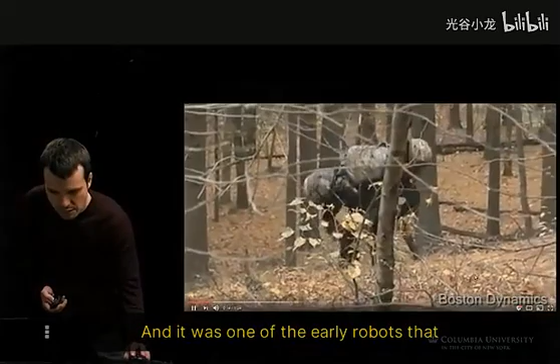Here's an example from a company called Boston Dynamics, which is now part of Google. And this is one of the first legged robots that they successfully demonstrated. This is Big Dog. It's a quadruped. And it was one of the early robots that was shown able to robustly navigate difficult, unknown terrains.

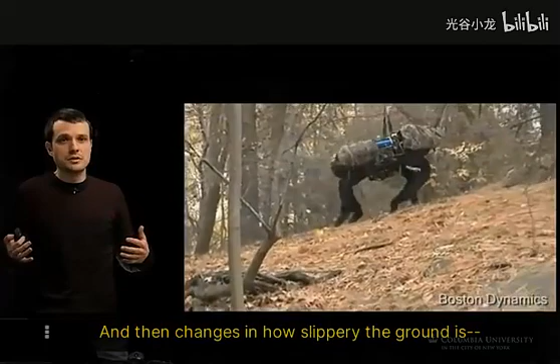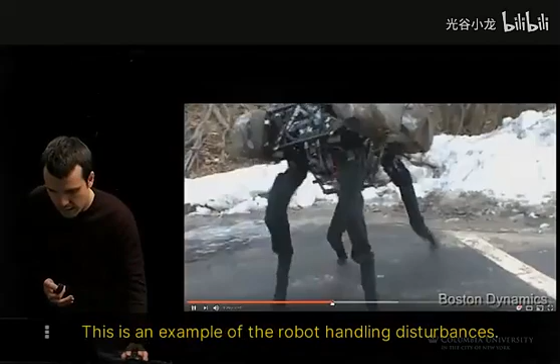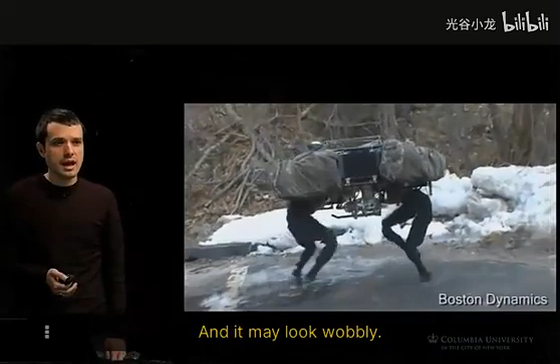So this forest floor is a pretty difficult terrain, all kinds of obstacles, and then changes in how slippery the ground is. Maybe you step on a branch that rolls away. Maybe you step on a sheet of ice. This is an example of the robot handling disturbances. Here's another example. This is the robot slipping on ice. And it may look wobbly. Actually, this is incredibly impressive how it's able to recover.

Think about how dramatic a surprise this robot encounters. It's stepping on asphalt, nice, solid, with high friction coefficient, and then all of a sudden it steps on ice, incredibly slippery.

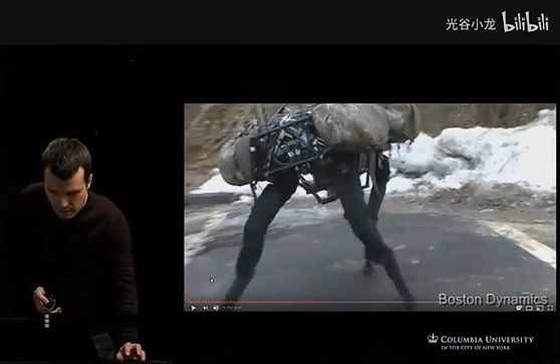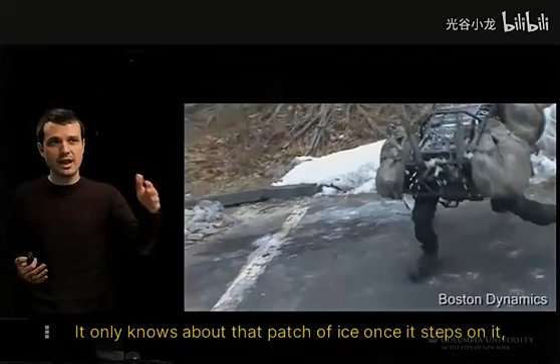And still, even though it's faced with this massive, dramatic, unexpected change in the environment, it doesn't have the sensors to look at the scene and know that there's ice ahead. It only knows about that patch of ice once it steps on it and the foot just doesn't stick. Most of us, I think, when that happens, we would fall. Big Dog, in this example, recovers, right?

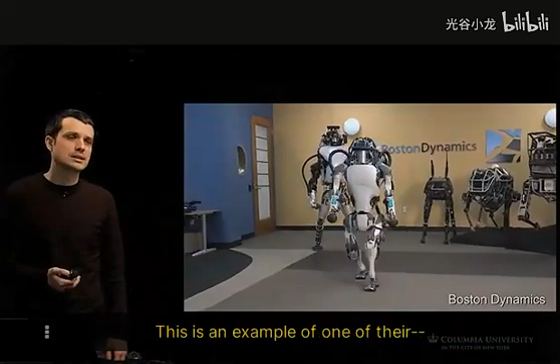And then here are more examples from the same company, who then proceeded from quadruped locomotion to biped locomotion. This is one of their more recent examples, one of the smaller bipeds. And here, notice it moving around, opening doors. Now you get a sense, hey, this could really go into a human environment.

But not walking just down a nice carpeted corridor; again, able to go outside, handle what is really, truly very difficult terrain in robotics, uneven. You never really know when you step on a patch of snow how deep your foot is going to sink. And still, this robot is able to navigate this incredibly difficult, complex terrain.

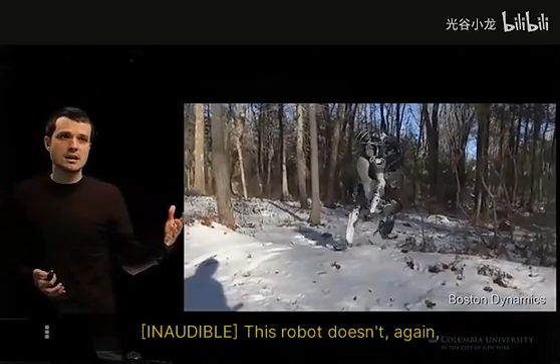Right? Anyway, this robot doesn't, again, have the background knowledge that we have in terms of how snow operates, how likely a patch of snow is going to be deep or shallow, depending on how it looks. And here it is, able to not just move itself around, but also start picking up external items from the environment. Here's another example of that,

also from Boston Dynamics, a very nice blend of wheeled and legged locomotion. And really, what the field is working on here is this ability to really understand balance from a dynamic perspective, and to really be able to maintain equilibrium under all kinds of very significant dynamic disturbances.

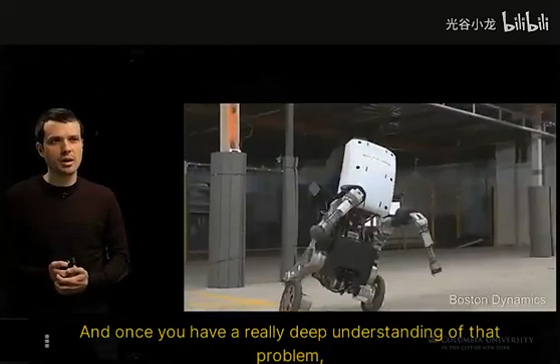And once you have a really deep understanding of that problem, then walking or this kind of very impressive legged driving, they become particular instances of it that you know how to solve. Again, disturbances that the robot maybe doesn't know about in advance, and it's still able to handle them appropriately.

And then another example of legged locomotion. Maybe these robots, while extremely impressive from a robotics perspective, still don't look as sure-footed as a person. The field is getting there. But there are places where robots can exceed human capabilities in some dimensions. And here is a robot in a research lab from MIT.

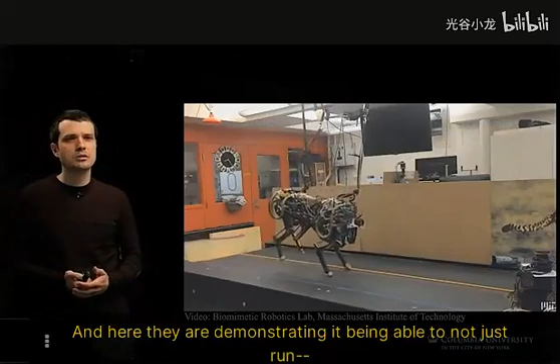The Cheetah is an incredibly fast legged robot, and here they are demonstrating it being able to not just run faster than most humans, but also to jump over obstacles. And the interesting thing, again, the obstacles are not known in advance.

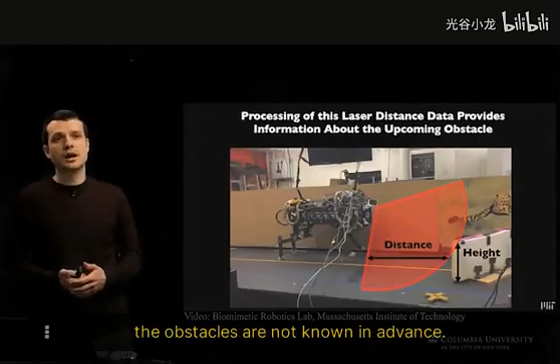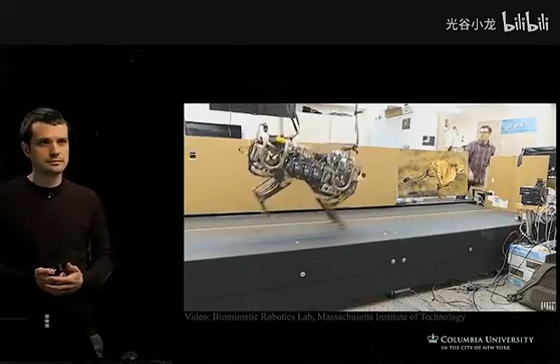So the robot uses its sensors, and in particular a laser range sensor, to see the obstacle and then to plan its footsteps to give it a possible jump over the incoming obstacle. And the obstacles get bigger and bigger.

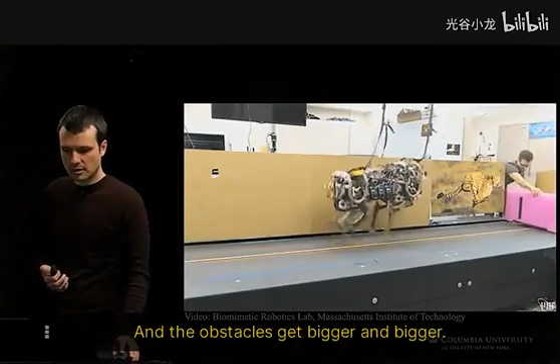Okay. So legged robots, maybe they are not as close to deployment as wheeled robots, but are making progress in leaps and bounds, if you wish. Putting this all together, mobility, manipulation, wheeled locomotion, legged locomotion, here's an example of a complete scenario where a robot is meant to go through a number of tasks inspired by disaster response applications.

So here is a robot that recently won this robotics challenge that is going through a number of tasks. First, it opened the valve, then it's picking up a drill. Notice that in this particular case, it's driving around in wheeled fashion. So it picked up a drill, now it's actually drilling a hole in a wall.

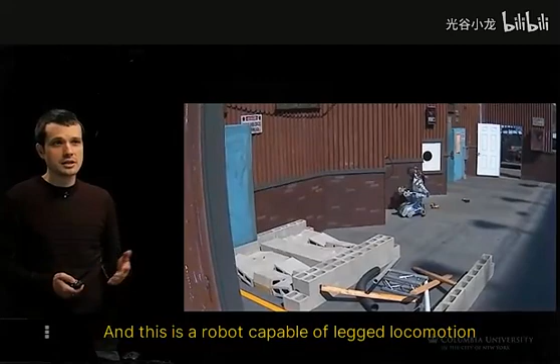And this is a robot capable of legged locomotion as well as wheeled locomotion. And why not, right? This is not something that we are able to do, but hey, it's fair game, right? So when needed, it can get up and walk, but when the terrain is nice and flat, why not take advantage of the possibility of wheeled locomotion and drive around?

If you can power through obstacles rather than gingerly stepping through them, even better. You get to somewhere where wheels really don't work anymore, then you get up and you walk if you can. This also gives you a sense how much the video is sped up. This is a particularly difficult task.

And again, this is nice because it combines multiple forms of locomotion. You're not bound to just one when designing a robot. There are other types of robotic mobility, not just these.

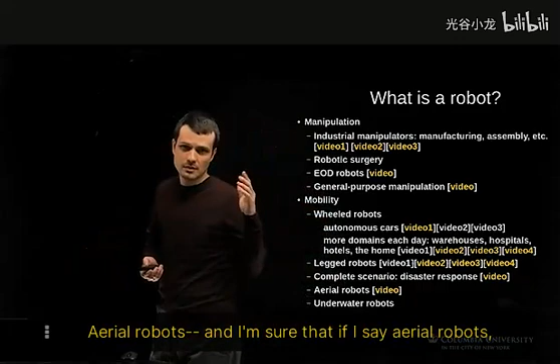Aerial robots. And I'm sure that if I say aerial robots, the first thing you think about is quadrotors. But what I want to show here is that that's not necessarily the only type of aerial mobility. This is Project Wing from Google X, and this is showing as an application delivering items to a remote part of Australia. And this is actually fixed wing robotic aircraft that's able to traverse large distances.

It's fast. It can localize itself. It knows where it is. It knows where it needs to go. So then what it does is it can traverse large distances quickly and deliver its payload to where it needs to go. So this is an example of the payload. It's just dropping the payload to its destination.

Right? So more surprising types of robot mobility. Underwater robots as well. The list continues. Right? Again, this is not exhaustive by any means. It's just meant to show, hey, these are some commonly known examples. And then finally, just to really drive that point home,

manipulators, mobile robots, they are pretty well known and accepted as robots. They either have had an impact on society already or are about to. But really the world of robotics is much, much bigger than that. And there are other things that, again, maybe you don't think of them as robots, but we could, right? So there are things that don't look anything like manipulators or mobile robots.

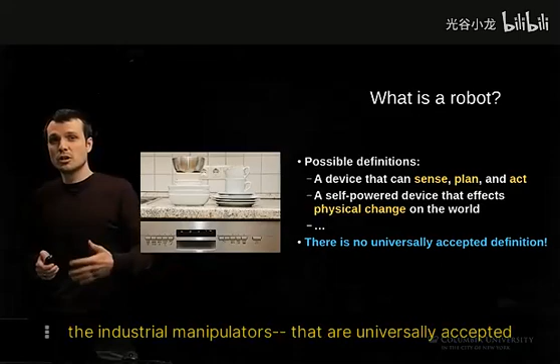However, some of the industrial manipulators that are universally accepted as robots, is there a lot of planning going on, especially if a human has pre-programmed the trajectory in advance? A robot, to me, is any self-powered device that effects physical change on the world. And that can mean an arm that's moving things around. That can also mean a robot that's driving itself around. A robot that's driving itself around obviously effects physical change on the world because it's moving itself. It doesn't have to move something else.

The dishwasher, it meets my definition, right? It does effect physical change on the world, and it is self-powered. You put in the dishes dirty, you take them out clean, right? That's an obvious example of physical change. And then if you think about it, the dishwasher, it looks like, okay, it meets the second definition, definitely not the first. The dishwasher will have a surprising number of sensors.

It will sense, for example, the weight of the dishes that you're putting in. It'll sense the humidity inside. It'll sense the temperature of the water. Some advanced dishwashers will sense how dirty the dishes are. So they will have a surprising number of sensors, and they will react appropriately to unforeseen conditions, right? So this kind of shows why there is really no universally accepted definition of what a robot is. To me, the dishwasher is a robot. To you, it might not be, and both answers are correct, right?

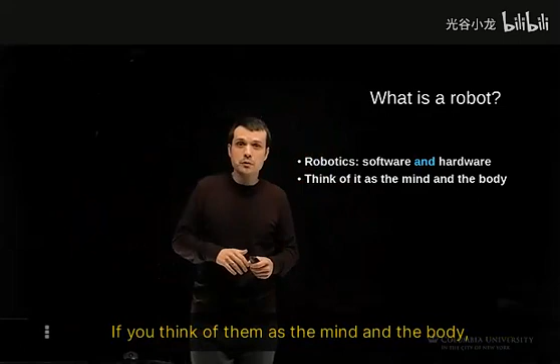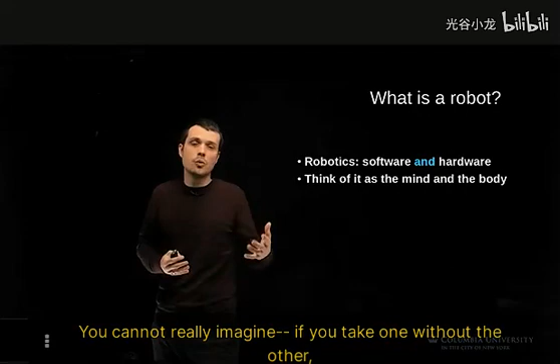Another thing to keep in mind in terms of defining robotics is that we're talking about the software and the hardware. And in robotics, they are really inseparable, right? If you think of them as the mind and the body, then it becomes clear just how inseparable they are. Just when you think about humans, the mind and the body are completely and utterly tied together. If you take one without the other, you no longer have a human. And it's very similar with robotics. And again, it's part of what makes robotics an exciting field to study, this interrelation between software and hardware.